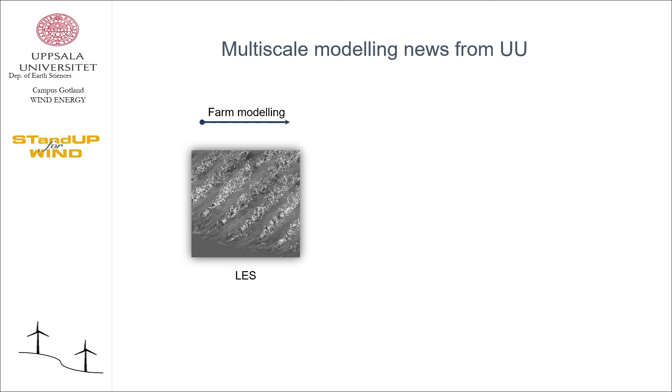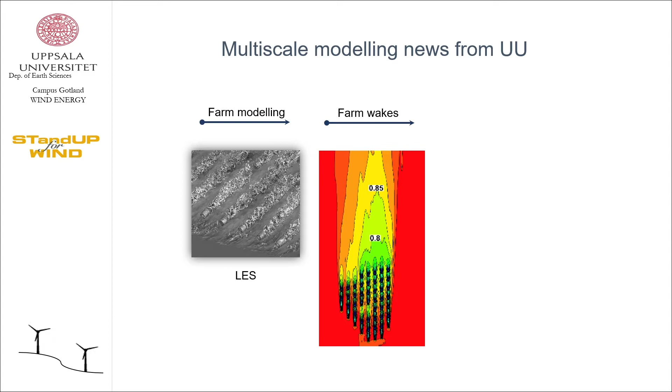And then we've been working on farm wakes and the farm-farm interaction and also blockage. And of course, inside the wind farms, we have the smallest scales generated within the farm, but also interaction with the largest scales, the Earth rotation scales. So it's really a multi-scale challenge to model this. And here we've been working with WRF and LES. And then in the last years, we also spent a lot of effort to develop forest models to represent the flow inside Swedish forest, to a great extent. So today I will touch upon this.

I will very briefly say something about farms, just mentioning some new novel methods that might increase the possibilities to run multi-scale models more efficiently in time with farms. And then I will say something also short about the farm wakes. Here we know that there's a need to develop engineering models and they need to be calibrated and validated. I will say something about how we can do that.

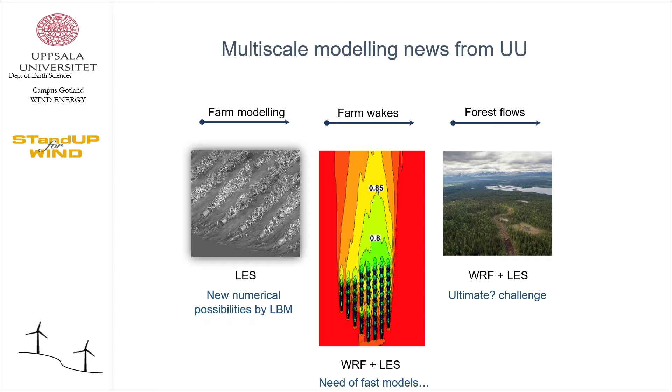And then what I call here the ultimate challenge. I don't know if that is the ultimate, but at least I put it here in this presentation as this, and see how we can then model this. And this is where I will spend the most time of today's presentation, on the forest models. So I will very quickly say something about farms, a little bit more on farm wakes, and then concentrate on forest modeling, and then some summary and conclusions.

So first, farm models. We've been working on that with standard LES, let's say, for many years. And recently, we've been working with lattice-Boltzmann methodologies that have been used for other applications than wind for some time. But here we have a publication coming out very soon on a new wall model, which makes it possible to run atmospheric boundary layers. And that is, I think, a big step forward to be able to run the cases we do. And that opens up possibilities to run wind farms on GPUs on a desktop machine more or less in real time. So it's a great decrease in computational need.

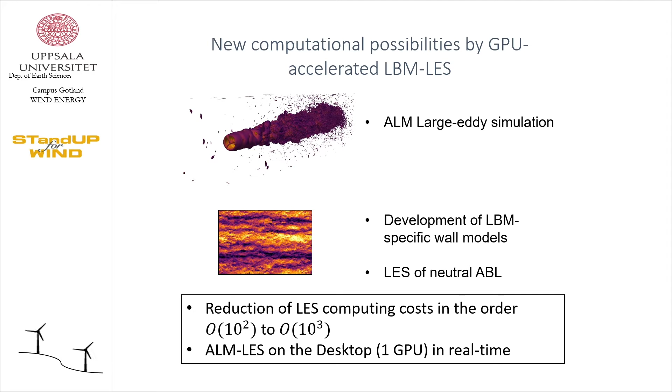So that is then also opening up possibilities for machine learning, etc., for farm optimization. So that I think is coming, and of course that could then also be coupled with more micro-mesoscale coupling, but I will touch upon that a little bit more later on. So that's what I want to say about farm modeling, and then I will move on to farm wakes.

So these are some preliminary results. I will not go into all details here, but this is the result from a farm in the Baltic Sea using WRF. And it's no surprise that the wake length and the wake deflection depend a lot on stability. But these are quite heavy simulations to do, and we need engineering models to be able to plan for a lot of offshore wind farms for the future.

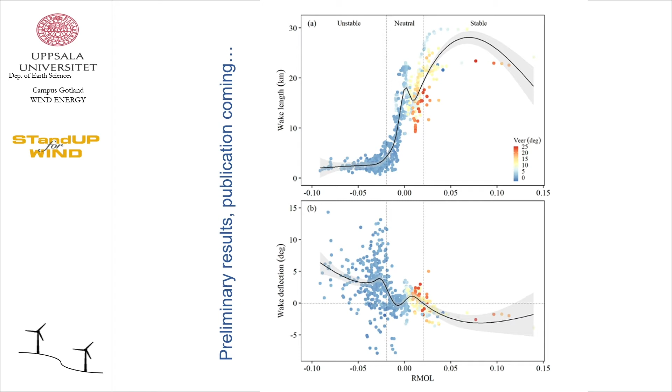And we have a collaboration with Durham University where we develop this type of engineering models, but here we also need input from high fidelity models. So here's an example with LES, instantaneous results and time averaged. But these are quite heavy, and we then need to validate and calibrate these engineering models.

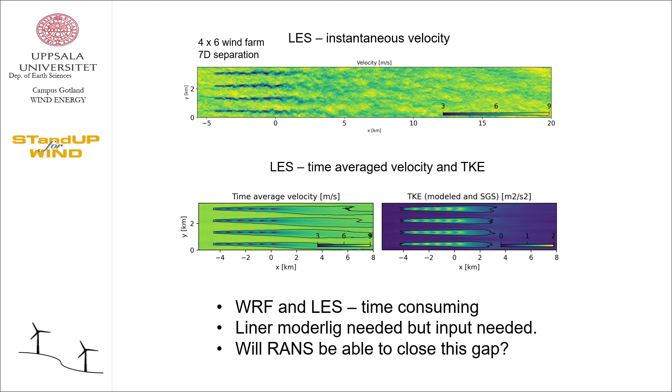And therefore, we looked into, can RANS do the job for this good enough? So we can run these cases quite efficiently in CFD and see how well we can do this. So this is just some examples of results. This is a bit of the talk, so hopefully we can present this later on more in detail. But this shows a comparison with LES in this case, no measurements, but with LES and RANS.

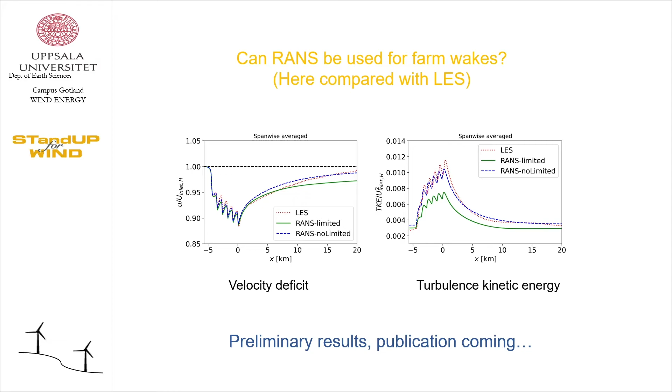And we can see that if we set up the RANS cases in the right way, we can capture the velocity deficit and the turbulent kinetic energy inside the wind farm and also in the farm wake fairly well. So that speeds up our abilities to create validation data and calibration data for engineering models. So that is what I'm going to say about farm wakes. But it opens up more multi-scale possibilities also when it comes to farm interaction.

And then I will go to my main topic on forest models. And this is what I call the ultimate challenge. Why? Well, we have the turbines here interacting with the atmospheric boundary layer. We have lakes and complex terrain. We have the time-varying atmospheric conditions, so diurnal cycles. So how do we model this?

This is quite challenging. And if we think about how we can model the turbines, well, we can use actuator line and actuator disks that we've done for many years. So that we know pretty well how to do. I will not today show any results on turbines interacting with the forest boundary layer, but of course we can combine these models with actuator line and actuator disks as well and represent the turbines.

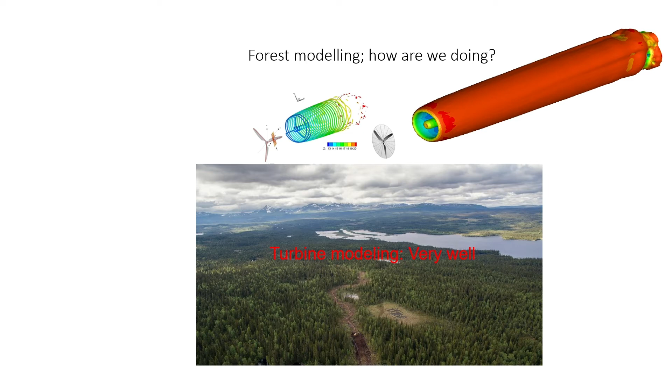Next question is then, how do we represent the forest flows itself? And here we've been spending quite a lot of effort, started in the NEWA project, and then we continued that work. So this is an example from a test case benchmark in Sweden called Ryningsnäs. We've had 2 turbines and a mast. And you can see here the airborne laser.

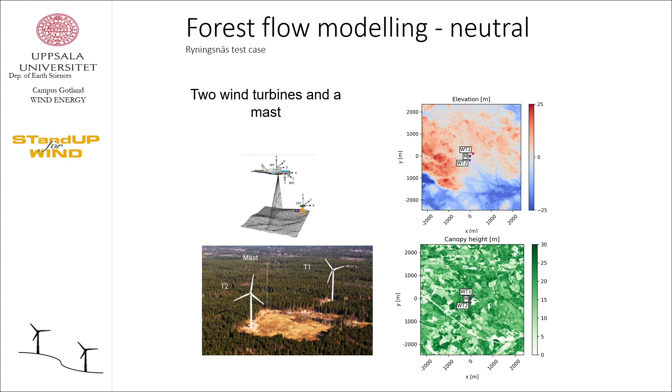So we have laser scans over all forested areas in Sweden, which is fortunate. And then we can map the forest in great detail. And then we can calculate leaf area index, and then we can put that into our simulations to really have a well-represented forest. And then we run a number of tests. How can we do this, and what do we need to do to really map the flow in the best way? And this is an example where we show if we would represent the forest in a box.

Let's see if I can point here, maybe. No, I cannot do that.

But you see on the upper picture there that we represent the forest well with these laser scans in this box, which is, well, not that small, it's a number of kilometers. But then we compare if we represent this in an even larger area, what's the impact of that? How large an area do we need to represent with this detailed representation of forest?

And then the figure here you can see, flat terrain here means that we don't have the leaf area index representation in the model, but we have the roughness, and then we compare with the smaller area and the larger area. And then you can see the TKE normalized with u* squared, and you can see that when we have this full domain, we can represent this quite well.

Then if we look into another case, similar, but from 3 different directions, we can then see the footprint will be quite different depending on what angle we are considering. And the figure here on the right-hand side shows the same as before. It's a bit messy here, but what you can see is the measurements from 3 different directions.

And then you can see that if we represent this forest many kilometers away, we can get very good agreement with the measurements. So it shows that with realistic forest topography for many kilometers upstream, the full profile can be reproduced very well.

Typically, otherwise, in LES, we can assume neutral. I think that is a good guess, and that's what we've been doing for many years, but we really need to look into the stability here. So, therefore, we have developed our model chain, and for this work we use OpenFOAM, an in-house version of it that we have developed. And here we then need to drive the flow with mesoscale simulations for realistic atmospheric conditions and transient features.

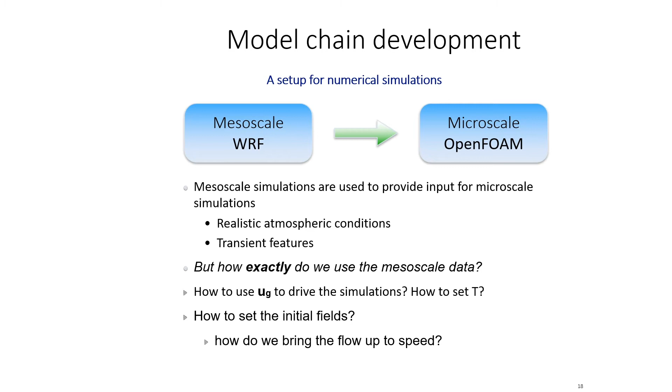And then the big question is, of course, how do we represent the forest in this case, and how do we drive the flow here? So this is an example of a square forest, what you see here with velocities and temperature in these pictures. So we just have a square forest. And then inside the forest, we prescribe the net radiation. And outside the forest, we prescribe the temperature variation. So this is the approach we used to get the diurnal cycle into the forest, let's say.

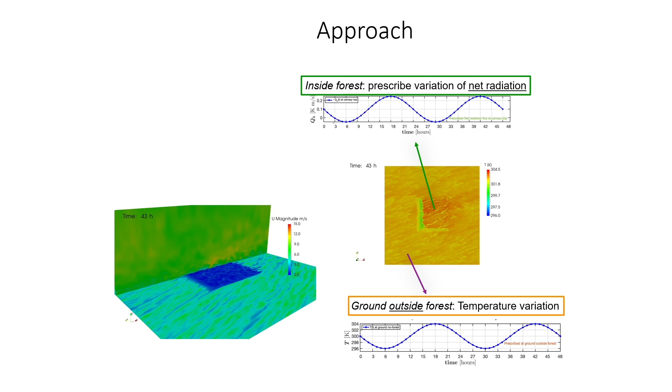So then, if we look into how this will look on a vertical cut, to see what implications this will have inside the forest. So what you see here is above the forest we have the radiation, and then inside the forest we have the leaf area index that, of course, will vary. So the radiation will not penetrate down to the ground, and therefore you can see in the lower picture the variations of heat fluxes with height, but also with time. You can see the time here, it goes from 0 hours to 48 hours. So the heat flux will vary with height and time for all of the prescribed conditions there.

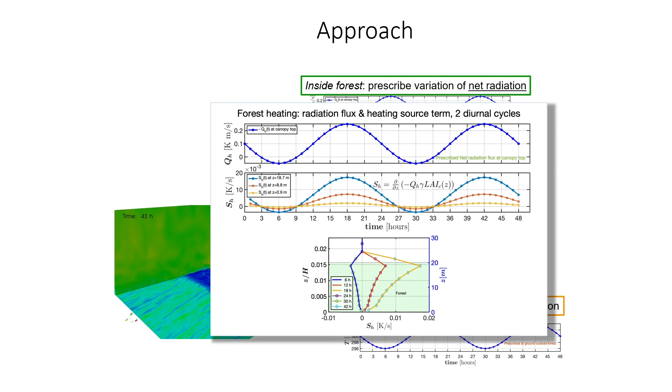Now my pointer doesn't work. Well, let's see. Now it works.

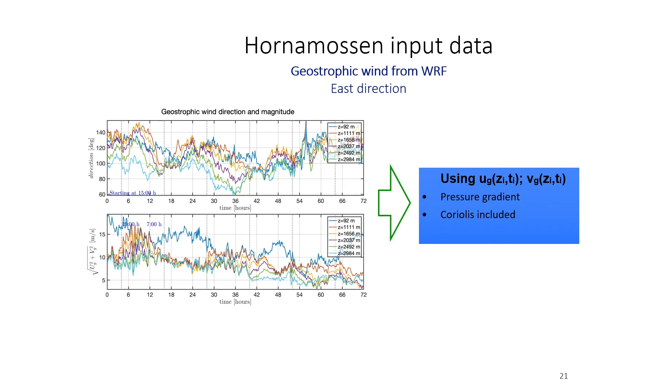So we use WRF. In this case, it comes from Roberto at CENER, who has provided us with the WRF data for the Hornamossen benchmark that we developed. And here we can extract the horizontal velocity vector and calculate the pressure gradient. And then, of course, we have the Coriolis included in this. And from the WRF, we can extract the temperature and also the global radiation. So then we can put this into our forest model, and hopefully this will be a good representation of the diurnal cycle inside the forest.

But then the big question is, how do we best drive this flow? We can use a vertically uniform and fixed in time pressure gradient, and that's what we typically always do. But we can also use a vertically uniform but time-varying one, depending on the input we get from WRF. Or we can vary both in time and height, and then we approach the tendencies method that Javier Sanz and others have developed. We are looking into the tendencies methods.

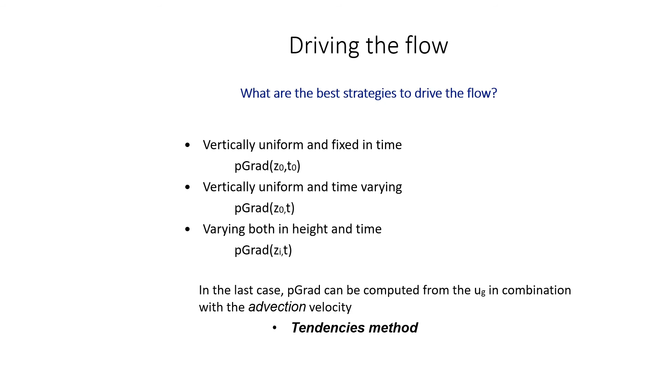I will not show any result of that today, but I will show results mainly on the second point, and discuss a bit around that. The reason why we haven't spent more time on tendencies yet is that so far we have not beaten the second way of doing this, let's say. But that depends on different aspects that I don't think we have time to go into today.

But then if we have these methods, what you see here on the upper left is constant uniform and constant in time. So you can see how the LES follows the WRF simulations. And then on the upper right, you see when we use this vertical uniform but transient. And I think this relates to Hugo's question to Björke before, that we get these oscillations because we have some mismatch in the balance between the WRF and LES here. So we have some equilibrium issues there.

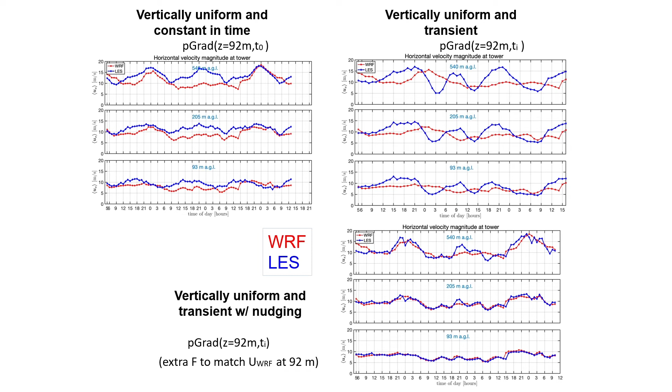But then on the lower right-hand side, sorry, maybe it's hard to read here. What you see here is the velocity vector at 3 different heights: 93, 205, and 540 meters. On the lower right-hand side, we still have the vertical uniform and transient, but here we force the pressure gradient at 92 meter height, so-called nudging. So then you see that the LES follows the WRF much better here. It looks like it works out very fine.

1 or 2 minutes. Yes.

And then this is what we do. We have this LES set up with periodic boundary conditions, and we start this simulation at 11, and then we let it spin up for 6 hours. So at 5 a.m. we start the diurnal cycle. And then we have this case, which is a test mesh. We have 6 million points here, and as it is a test mesh, this costs about 70,000 CPU hours. So for LES it's not extremely expensive, but of course it's still a test case. We have a resolution of 50 meters, and you can also see the met mast in the center of this domain here.

What you see on the lower part here is the vertical uniform and constant in time method. In the middle, you have it transient, and on the right-hand side, transient with nudging. So hopefully I press this, and all these animations start at the same time. Yes, it works. What you can see here is how the LES develops according to the WRF. On the left-hand side there's some offset. In the middle you have these oscillations occurring, and on the right-hand side you see the result with the nudging, which we think is very good. So we can really prescribe the flow with WRF, and the LES follows that.

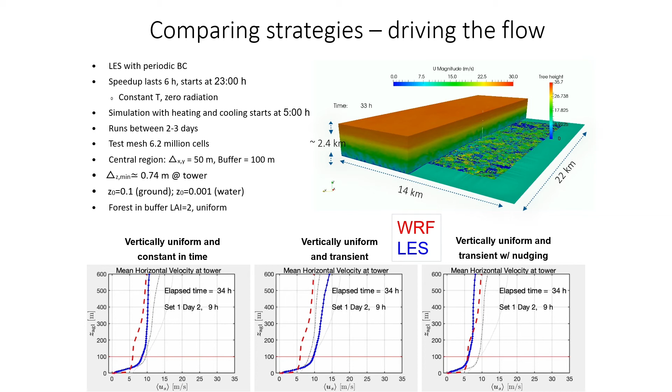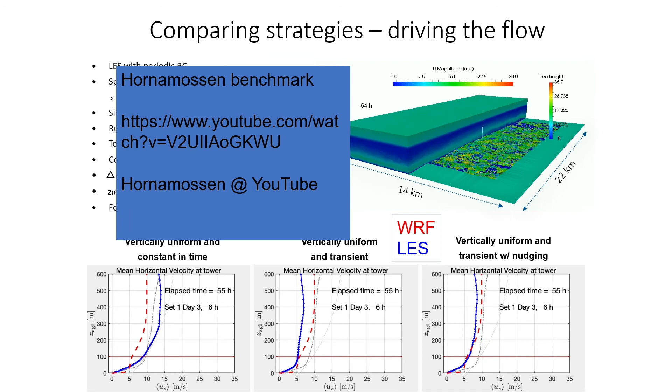I will not show any results here comparing with measurements, because this is a benchmark that is still a blind test. We will not do that yet, and this is still a test mesh. But this benchmark, Hornamossen, unfortunately the web page with the Windvane blog doesn't work right now, but if you search for Hornamossen YouTube, you can find a video of this benchmark if you are interested to follow more news. And it's really focused now on the model chain development.

So then I will go to conclusions. The first part I mentioned very briefly was the lattice Boltzmann in farms. Here, this LES approach looks very promising. Now we have an atmospheric boundary layer, and we can use that for optimization, and possibly also drive it with WRF, as we showed with OpenFOAM here. But that's far ahead, I would say. The second part was that RANS can provide important calibration data for farm wakes, which was new for me. And the last part, the LES approach to model typical Swedish forest has shown excellent agreement in neutral conditions, and that has been published before.

But now we have been implementing this new diurnal cycle in the forest and tested different forcing methods, and it looks very promising, and it reproduces the trends in temperature variation very well. But this was still a test case. There will be a full case and then validation against this extensive measurement campaign that we had in Hornamossen.

And with that, there's a lot to learn about parameterization of boundary conditions and forcing strategies, and it's useful for setting and testing RANS linearized models of stability transition over forests.

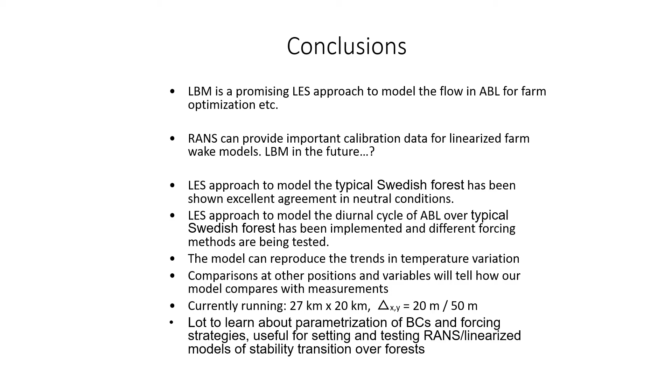So I think I made it in time. Yes. Yeah. Thank you.

Yes, thanks, Stefan. Also, because of the time, we have time to answer the questions that were coming in. So Javier Monduet asked Stefan, thank you for your presentation. What is the difference between the RANS limited and non-limited setup? Well, it's a length scale limiter in the RANS. So typically in RANS you can set that, but when looking into these farm wakes, you really need to not have that setting in the RANS setup.

Thank you. And then Richard Stevens asks, very interesting talk, Stefan. On the first part of your presentation, how do you define the wind farm cluster wake length? The first part of... Yeah, you showed some slides with axes with wake length. Yeah, you mean in these WRF results, yes. In that case, I think we define it as 90%, if I recall correctly. There's a publication coming soon, hopefully, where it's fairly clear.

But if I remember correctly, we spent a lot of time on methodology, how to look into the farm wake turning and the turning just behind the wind farms. So that paper will have a lot of methodology on how to categorize that. So that is a big part of the study. But what I show here, I think, is 90% of the velocity, if I recall correctly.